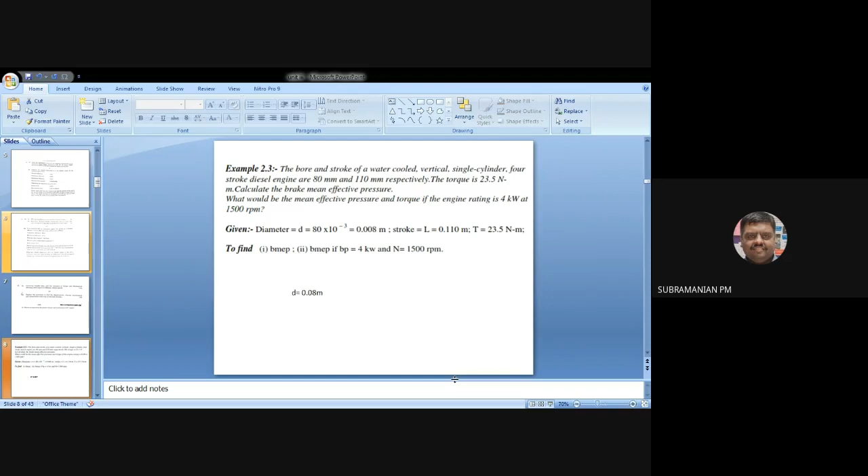So they will not ask all other things, only the first one. They will ask you what is brake mean effective pressure. So we'll be using this formula, brake mean effective pressure equals 16T over D squared L, 5.34. That's all, a 2 mark will be completed. Only a question like this can be asked. They will not ask all the values, just one value. Next, if they ask you to find the brake mean effective pressure, brake power will be given. So formula, substitute the value, answer. That will be the 2 marks.

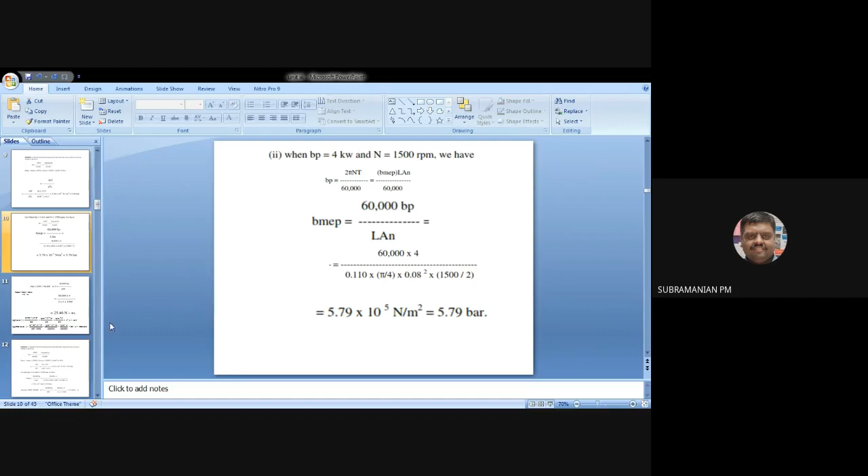So we have seen that problem. Now we'll be seeing another problem; in the conventional exam you may get a question on this for 13 marks. But the 13-mark problem may be converted into 2-mark questions. Okay, data will be given.

What I mean to say is you will be finding input power. Or they may ask for indicated thermal efficiency. For that, you need not find indicated power; indicated power will be given. But the logic is you have to know all the formulas we are using in the Part B question.

Okay. Now see, last class we have seen this performance curve. In that, they may ask a question: why will indicated mean effective pressure be greater than brake mean effective pressure? The difference between both will be the friction mean effective pressure. So questions like that can be asked. That is how you infer information from the graph.

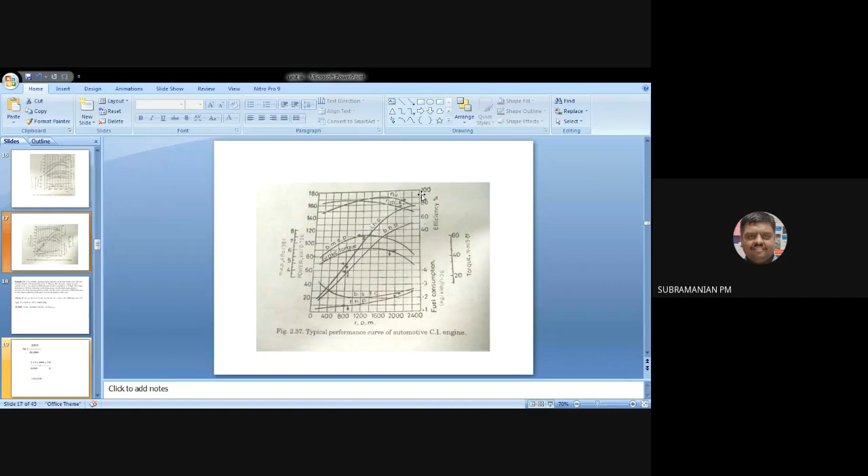They may be plotting two trends of the curve. Four options will be there. They will plot a curve and ask which is the performance curve for the SI engine and which is the performance curve for the CI engine. So a question like that can be asked.

Okay. Now I will be addressing this problem. This has been asked in the university exam several times. So take a notebook and pen and take down this problem. See what is asked. An automobile engine is operating at a thermal efficiency. So what is the given data? Thermal efficiency is 22%.

Let us keep a blank side. Read this problem: it is assumed that an automobile engine can operate at a thermal efficiency of 22%. Let us write the given data first. Simultaneously, you can also write thermal efficiency. How much is given? 22. Either you can put 22% or 0.22.

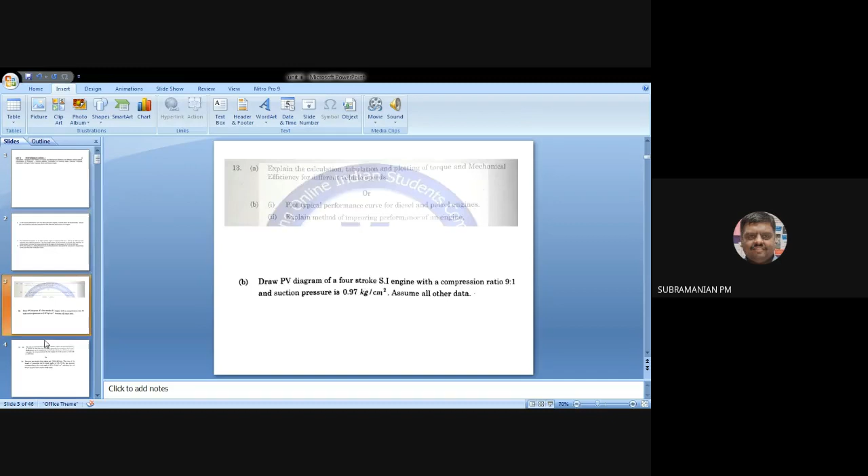Let me check whether this problem was asked. Is it the same number? Yeah, this problem only. We are solving the correct problem. I think we didn't solve this.

Theoretical air ratio 14.5. That you know already. So you can write air-fuel ratio.

That is a chemically correct air fuel ratio. You can write CCM. Chemically correct air fuel ratio is 14.5 is to 1. But in this problem, it is given excess air 25%.

Manikandan, please unmute and answer. Now today, my voice is audible, so that I have to check it again. Manikandan, let me go to chat box whether it is audible or not. 11% told it is audible. Manikandan, unmute man. Manikandan, Vishnu, Raghuman. Someone please unmute and tell whether audible or not. Otherwise, now itself I will correct. Last class problem came no. What happened to Manikandan? Mic problem, it seems. Okay.

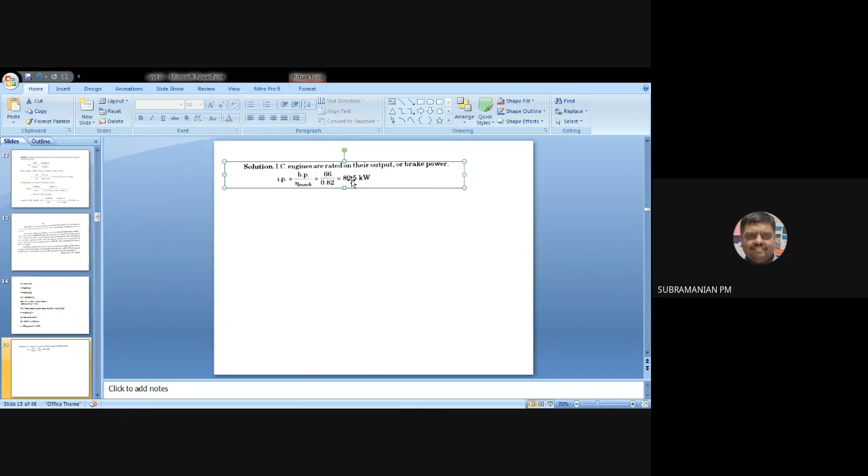So I can find indicated power like this: 66 by 0.82, that is 80.5 kilowatt. Next, this is the first 2 marks you have understood. Like this, you have to get the information. You will not get the entire problem. But for learning, you must be able to solve this problem. And due to this online exam, you have to understand the 2 marks, breaking the 13 marks into 2 marks. So the first 2 mark is this one, finding indicated power from brake power by mechanical efficiency.

Okay. Manikandan, can you please unmute?

No response. I think he is connected, but... Yes, sir. Okay. Now audible? Yes, sir.

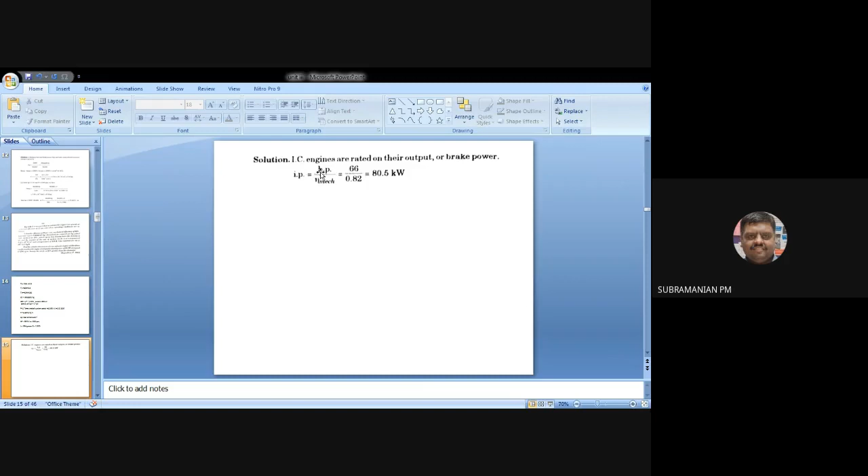Today teaching methodology will be different. That is to address 2 marks. 13 marks will be broken down into 2 marks. The first 2 mark is for finding indicated power: brake power divided by mechanical efficiency. Okay. Next, you see

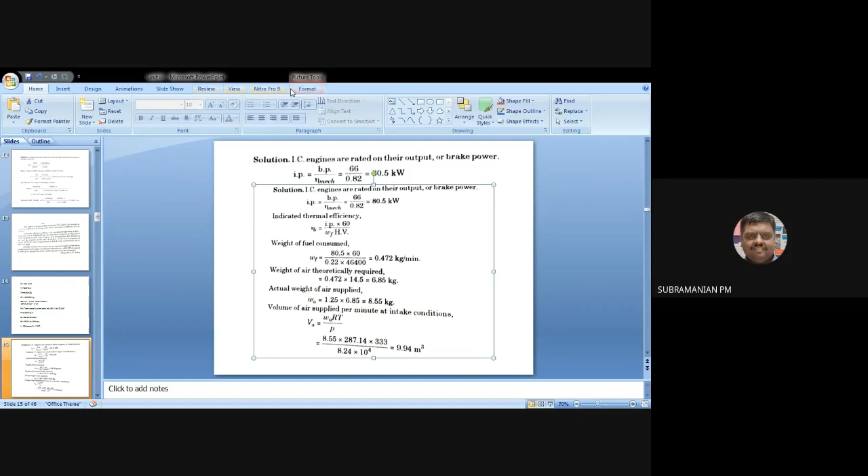we have to find indicated thermal efficiency. Let me crop it. So whatever is essential... this one is not needed for me, but this is needed. See, I am putting everything. Everything is 2 marks now. Listen carefully. Everything is 2 mark now.

First of all, indicated thermal efficiency can be found by this formula: indicated power multiplied by 60, divided by weight of fuel multiplied by heating value. In order to get kilogram per minute, we are putting 60. This one is kilogram per minute. For converting into joule per second, the 60 will be going into the numerator. So indicated power is kilowatt, and heat value multiplied by W will be kilowatt, so that will be cancelled, and you'll be finding indicated thermal efficiency.

Now see, if I ask you to find the indicated thermal efficiency as a 2 mark, I'll be giving the data. You need not find weight of fuel; directly I will be giving this data. Heat value also will be given. Indicated power also will be given. Just substitute the values and find indicated thermal efficiency. For that you should know this formula: indicated power into 60 by weight of fuel consumed multiplied by heating value.

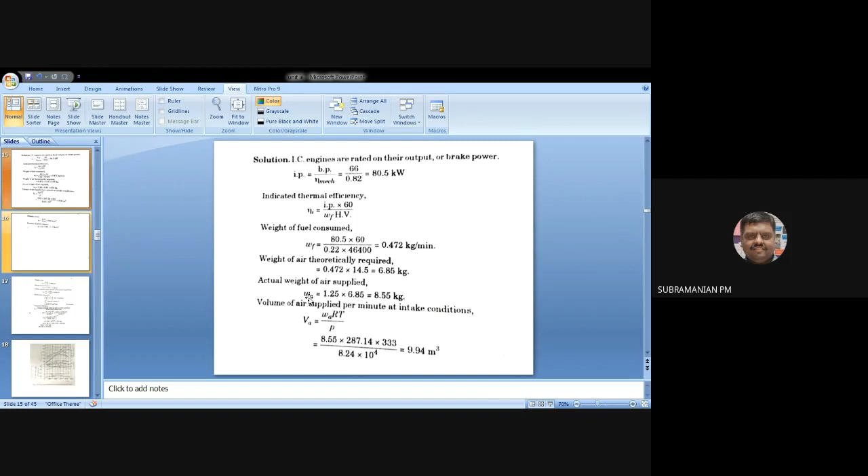Now let me see density of air. Density of the air is mass per unit volume. I am not putting all the data, slowly I am going to explain you. Weight of the air is given, volume of the air also is given. Weight of the air we have calculated, otherwise there will be another 2 mark where the mass of the air will be given. In VTU, even though it is kg, they use the word weight of the air, but actually it means mass of the air. So mass and volume of the air will be given, and you may be asked to find density. It is a very simple thing.

So you substitute mass, 8.55, divided by volume, 9.94, and you find the density. For density of the petrol vapor, go to the given data: density of the petrol vapor fuel is 2 times that of air. So with 2 times, I have found out density of the fuel. Now see volume of petrol vapor. Density of the fuel vapor is given. Density is equal to mass by volume, so volume is equal to mass by density.

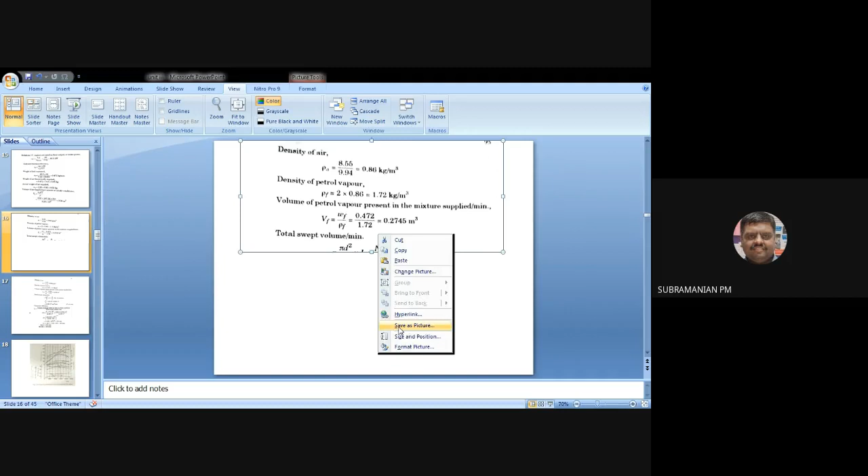Next, there may be a problem to find swept volume. That will be a 2 mark. That will be pi by 4 D squared L into N by 2 into number of cylinders. For number of cylinders, you will be using the alphabet K. From this only, I'm going to find my L and D. So total swept volume: pi by 4 D squared is area of the cylinder, multiplied by stroke, and N by 2, because it is a 4-stroke engine, so that is the number of power strokes, capital N by 2, times number of cylinders.

So you substitute this; you don't know D, so you are keeping it like this. But this concept you have to take. I'll be giving the diameter, the stroke, the speed, the number of cylinders, and I will be asking you to find the swept volume in 2 marks. From this problem, you will be able to find swept volume using this formula.

And next one, another 2 mark is volumetric efficiency. In this problem, volumetric efficiency is given 0.8. Go to the given data, 0.8. From that only, I'm going to find what? Diameter. Okay. So, but I may ask you a problem to find volumetric efficiency, so that total swept volume will be given and volume of charge taken in. Okay. That is VA and VF will be given.

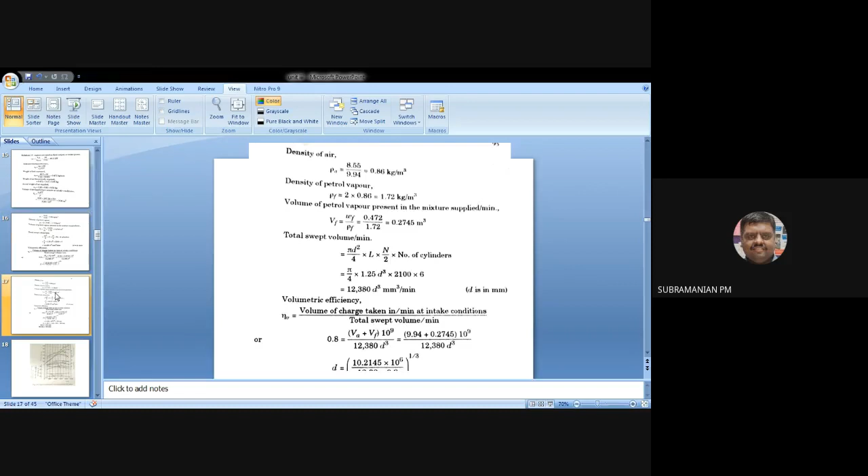But here, what I am doing, VA VF is given. I don't know the bore diameter. Using this expression, I am going to calculate what? D. Okay. So see, I will not show this. I am cropping this now. You will be able to understand well. So this will be the answer for both 13 marks, as well as we will be able to get 2 marks. See, volumetric efficiency, you can use this formula. VA, VF, you should be able to find.

That is volume. Okay. So I may ask a question, volumetric efficiency given, total swept volume is given, find the bore. Otherwise, I will be asking a question to find volumetric efficiency, swept volume will be given, otherwise VA and VF will be given. So you have to understand, volumetric efficiency is equal to volume of charge taken in per minute at intake condition. So what will be the volume? See, in engine, both air and fuel is going to get inside. So you have to consider both volume of air plus volume of fuel. Okay. So from this, I will be able to find diameter, bore.

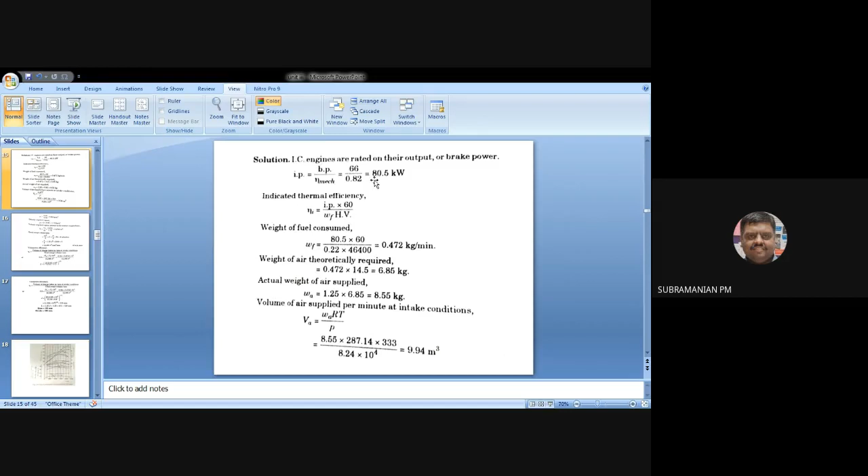Okay, ratio is given. So 13 marks is solved. The same 13 marks will not be given. From this 13 marks, 2 marks will be given. See, you can see my objective, that is in preliminary exam. I may give the data brake power and mechanical efficiency, and I may ask you to find indicated power. Okay, so each part of this 13 marks can be converted into 2 marks.

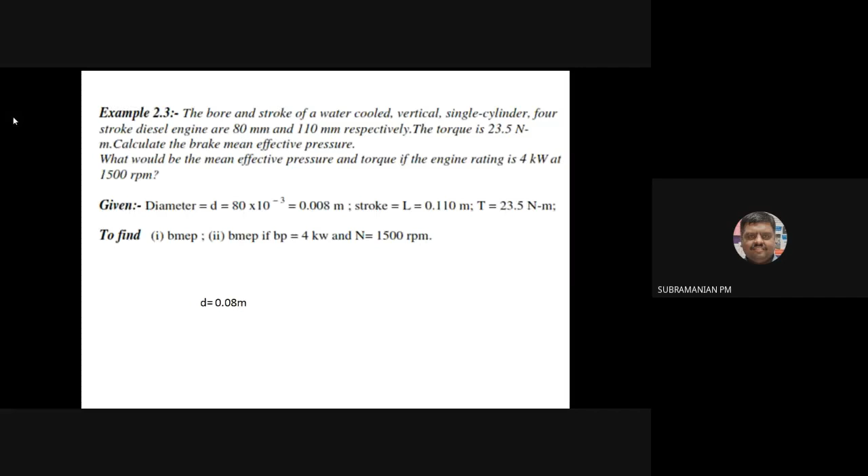Okay, now I will be showing one formula to you. So hereafter, the 13 marks with this third unit is over. Now I'm going to address how to handle the 2 marks. What are the problems? What are the theory questions you may get in third unit? The third unit, 13 marks also, it is over now by seeing this problem. Now see, you have to understand what is indicated horsepower, brake power, frictional horsepower. You look at this slide.

I will have some water and I will come. Check whether I am audible now. Manikandan.

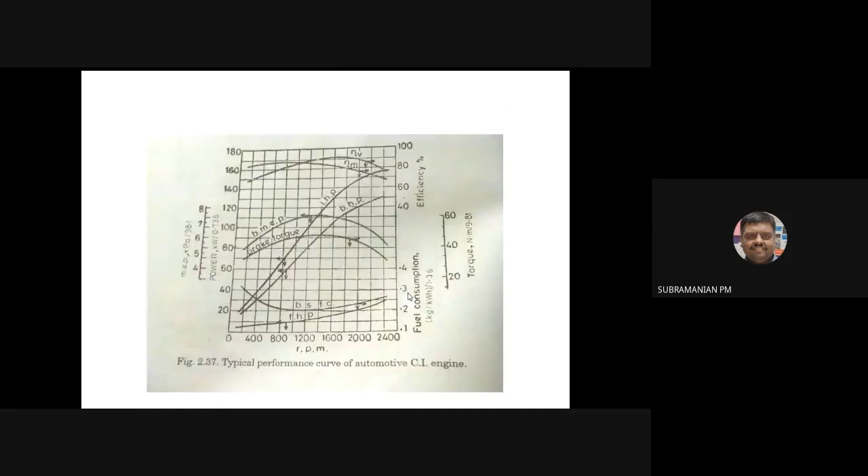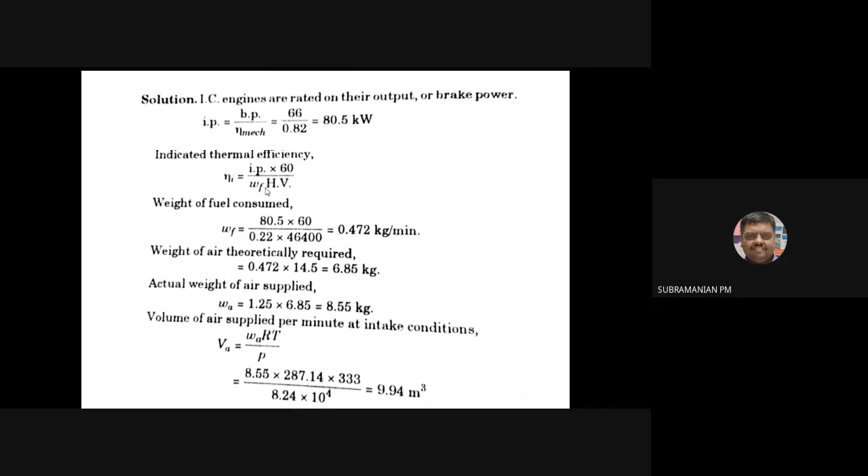See, it is the same formula only, indicated power divided by energy. Why am I putting 60 here? I am going to put my weight of fuel per minute. Then kilogram will be cancelled, giving kilojoule per minute. But indicated power is in kilowatt. So rather than converting into kilowatt, I am putting 60 to adapt this formula. Here, WF is kilogram per minute. If I'm putting WF in kilogram per second, there is no need of this 60. Okay.

So see here, indicated thermal efficiency will be indicated power by energy in fuel per second. Either it should be in watt or kilowatt. Both numerator and denominator should be the same. And how to find energy in the fuel? That is, how much energy the fuel is going to give. We will be able to find it by multiplying mass of the fuel per second by calorific value.

If I am going to put in mass of fuel per minute instead, then 60 should come in the numerator. For converting to seconds, I will be dividing it by 60. That is, 60 seconds will be 1 minute. So that 60 will be taken into the numerator. Okay.

So take down this formula. This formula is based on seconds, and you can write mass of fuel per minute; then in the numerator you put into 60. So write it clearly. I will be giving 1 minute time. It may be asked in 2 marks or 1 mark. Without knowing the formula, you can't do anything.

Already Manikandan asked me to give the formula. Now I am presenting the formula. Provided you write it, then only it will be good. Manikandan, please unmute.

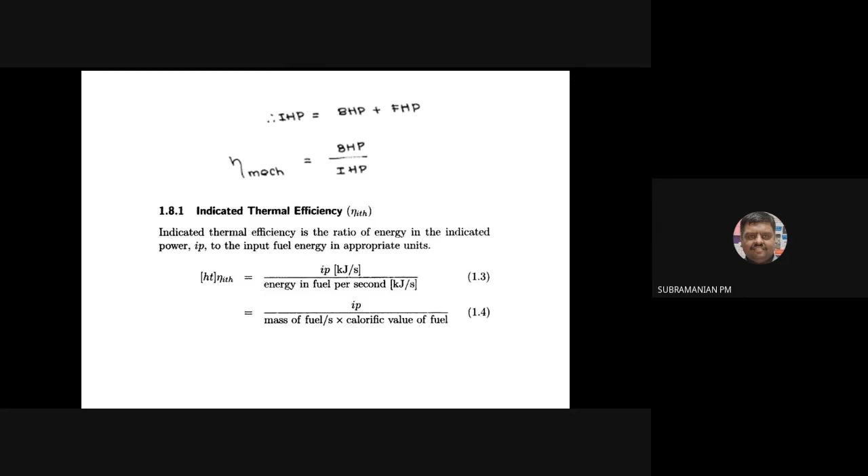Before the day of the exam, you need not go through the book. You can go through the formulas you have written, and the observations you have done for preparation of this course. Anyway, I will be sharing the slide with you. And this is very, very important: you have to understand what is brake thermal efficiency, what is mechanical efficiency, what is indicated thermal efficiency.

See, my energy in fuel is going to get decreased. I will be having energy in the fuel in kilowatt. But what will be my indicated power? I will be losing some energy. A significant portion of my energy is getting lost: energy is going in exhaust, in coolant, in radiation. So this is my indicated power.

It means only this much of energy I can convert into brake power. Energy available to convert into useful work will be this one only, because energy in fuel is lost in exhaust, coolant, and radiation. And again, I will not be able to convert all this energy into brake power. Some energy will be lost in friction and pumping, which accounts for the difference between indicated power and brake power.

Now please understand, between indicated power and brake power, the difference is energy lost in friction and pumping. Don't take this into here. Friction and pumping cause the difference between indicated power and brake power, whereas energy loss in exhaust, coolant, and radiation is considered from fuel to indicated power. Okay, so you understand this.

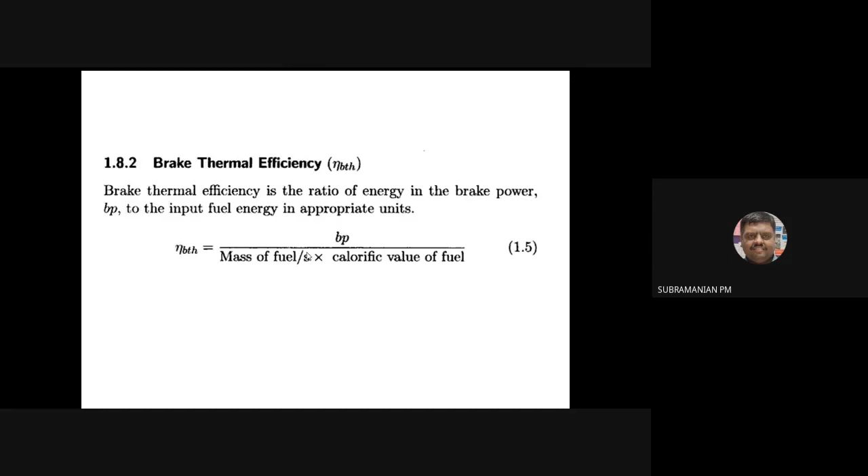Next, mechanical efficiency. See what are the different versions of this formula. Mechanical efficiency is brake power by indicated power. How to write indicated power? The difference between brake power and indicated power is frictional power. Frictional power is equal to indicated power minus brake power. So I can write indicated power is equal to friction power plus brake power. So instead of this, I can write BP plus FP. I can find mechanical efficiency if any two powers are given, either brake power and indicated power, otherwise brake power and friction power.

Okay. And how to find friction power? Friction power is equal to indicated power minus brake power. Okay. And you can see brake power is delivered power. Indicated power is power provided to the piston. That is, brake power is power delivered to the output shaft, whereas indicated power is power delivered to the piston. Okay. So copy this formula.

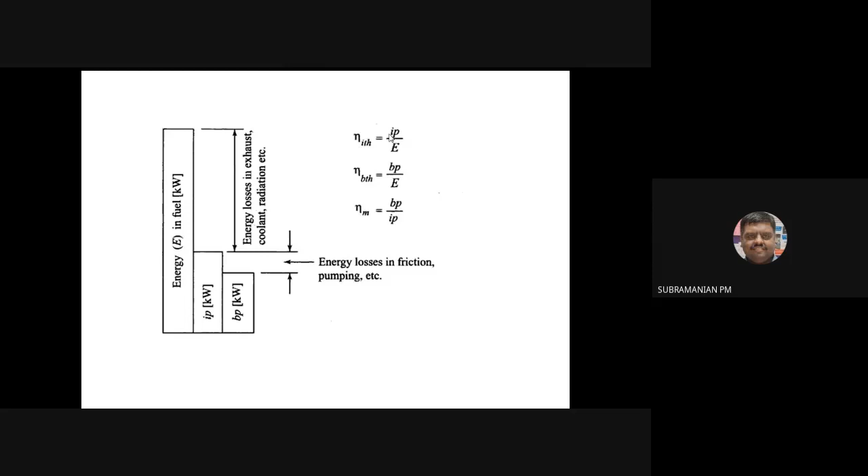This also you write: mechanical efficiency is equal to brake thermal efficiency by indicated thermal efficiency. This is very, very important. That is, I can find mechanical efficiency either by brake power and indicated power, otherwise by brake thermal efficiency to indicated thermal efficiency. It can be written as a formula: mechanical efficiency equals brake thermal efficiency divided by indicated thermal efficiency. The other terms will get cancelled. That will be BP by IP.

So copy this. How to find mechanical efficiency? Why am I asking to copy? Then only you will be knowing the answer. The same thing can be asked for 1 mark or 2 marks. For 2 marks, the value will be given and you have to find mechanical efficiency. So you are preparing for both 1 mark as well as 2 marks. Copy it. Copying is essential. Then only you will be knowing the formula, or you will be able to choose the correct formula in the multiple choice.

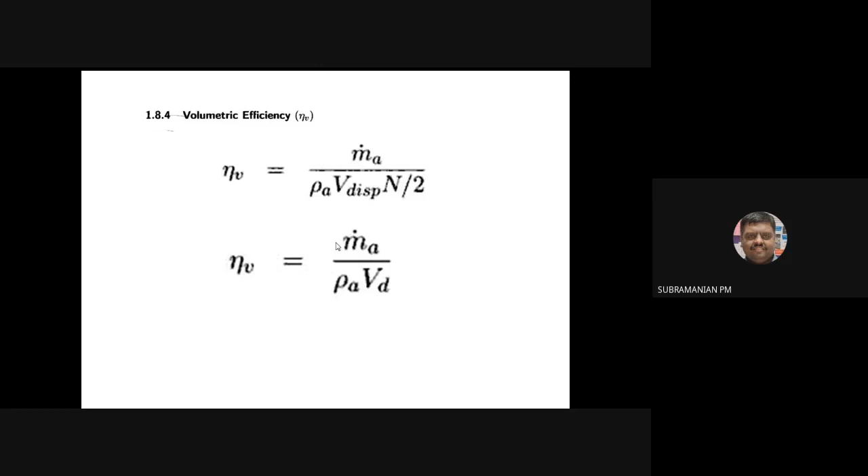Next, see volumetric efficiency. First of all, for volumetric efficiency, write the formula we have seen in the problem. Volumetric efficiency is equal to volume of charge taken in per minute at intake condition divided by total swept volume per minute. Everything per minute. Okay. That is how much charge I am going to take inside the cylinder.

So first of all, write this formula: volume of charge taken in per minute at intake condition divided by total swept volume per minute. From the problem point of view, we are using this formula. This is the basic formula. It means how much the engine can take in and how much it can displace. In the denominator I am putting swept volume. It means how much it can displace.

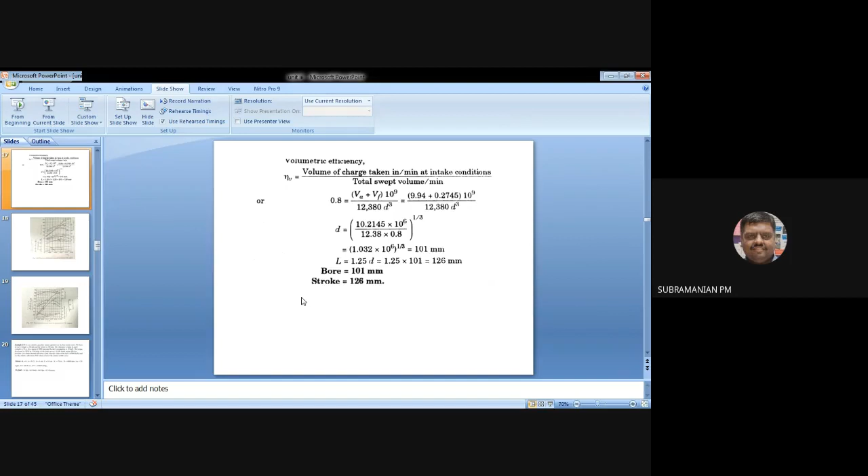Now you write: volumetric efficiency can be found by these two formulas. Mass flow rate of air divided by density of air into volume displaced into N by 2. That is for a four-stroke engine, okay? Two-stroke means capital N alone. And this one can be written as VD, that is the swept volume. So write these two formulas for finding volumetric efficiency. MA stands for mass flow rate of air, rho A density of air, volume displaced, N by 2 for a four-stroke engine. Write this formula.

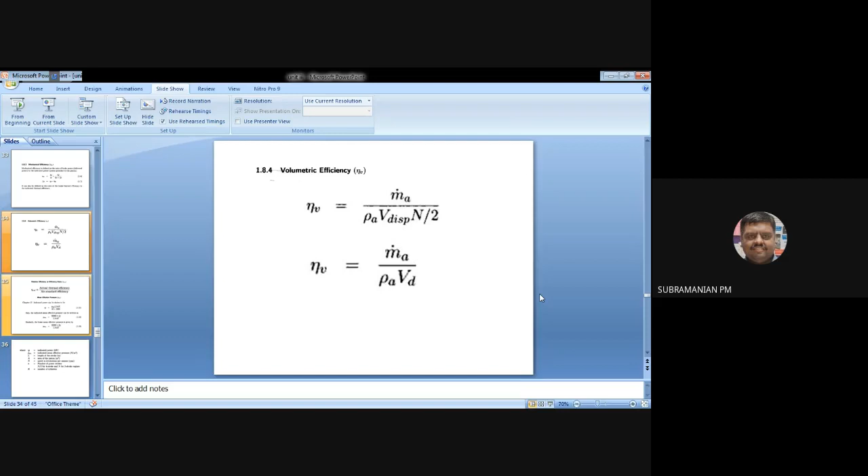Okay. Now see, there is another formula, relative efficiency. We have seen a problem two classes before. How to find relative efficiency? That is actual thermal efficiency by air standard efficiency. In one problem I have told you, Otto cycle. So the air standard efficiency of the Otto cycle has been compared, whereas actual thermal efficiency will be given or you have to find it. That was in the last class. I will be showing the problem.

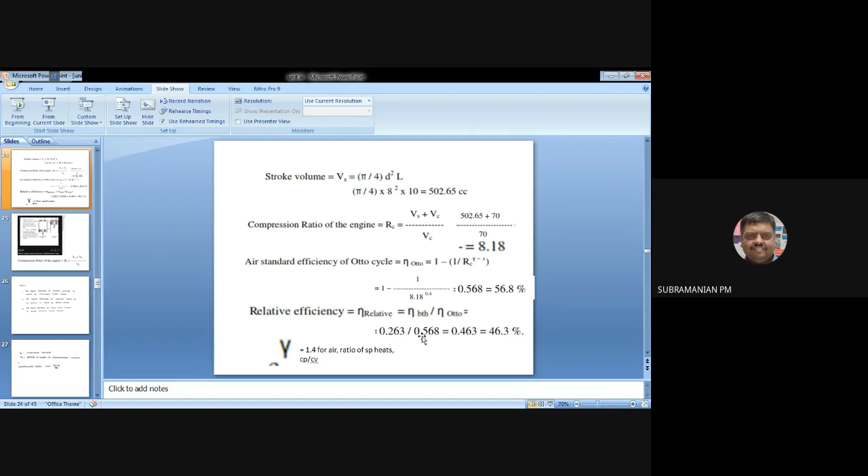So that relative efficiency I am going to define. You will not be asked like this. They may ask what do you mean by relative efficiency in 2 marks. They may ask you like this. And you may get a question where the actual thermal efficiency will be given and air standard efficiency will be given. You have to find relative efficiency.

Other word is efficiency ratio. Remember this. In 2 marks they may ask to define it. The efficiency ratio is defined as, three options will be there. Air standard efficiency will be in the numerator in two options, and instead of actual thermal efficiency they will put some other term like volumetric efficiency. So you have to identify the correct one. It will be actual thermal efficiency divided by air standard efficiency. Okay.

So take down this, and then the main thing we have done in problems is finding indicated power in kilowatt. See this formula, everything related to kilowatt. Whenever I'm putting 60,000, it is in kilowatt. I'm finding indicated power from indicated mean effective pressure. So indicated mean effective pressure, L A n K. What is L? Stroke. A, cylinder area. Small n is number of power strokes.

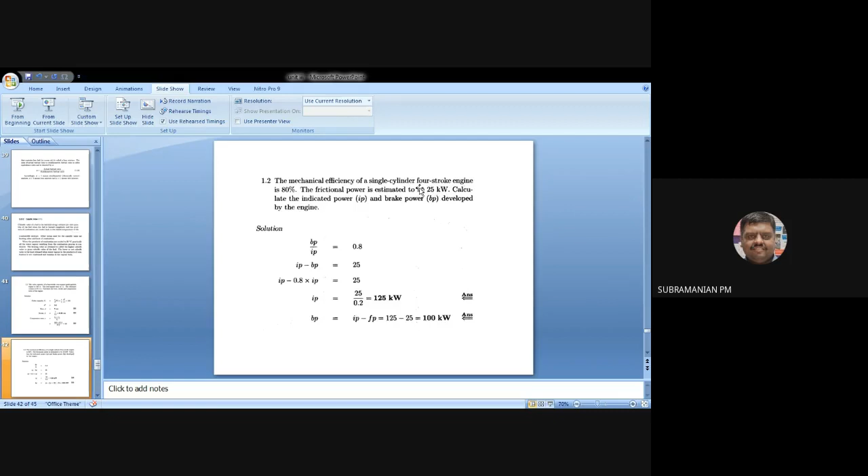So next problem, C. Mechanical efficiency of a single cylinder four stroke engine is given. Mechanical efficiency. Friction power is given, that is 25 kilowatt. So this is very, very important. You please make a note. I'm sure that this type of problem will come for you in VDDC in 2 marks. Only two data are given. See, mechanical efficiency, then friction power. You have to calculate everything.

Mechanical efficiency is what? Brake power by indicated power. That is 0.8. Friction power is what? Indicated power minus brake power. So using these two relations, you have to find the others. By mechanical efficiency, you will know the relation between brake power and indicated power. Brake power is equal to 0.8 into indicated power. You are substituting like this.

So indicated power you will be calculating, and for calculating brake power, friction power is given. Okay, 25. Either you can use it like this or you can use mechanical efficiency. That is, indicated power 125 into 0.8 you can use. Otherwise, 125 minus 25 you can use. Both methods are correct.

Okay, so this is very, very important. I guess this type of problem can come because the data given is 2 and you will be able to calculate both brake power and indicated power. Okay, so this is somewhat more interesting. You copy this. You are using this formula, mechanical efficiency formula, friction power formula. Okay.